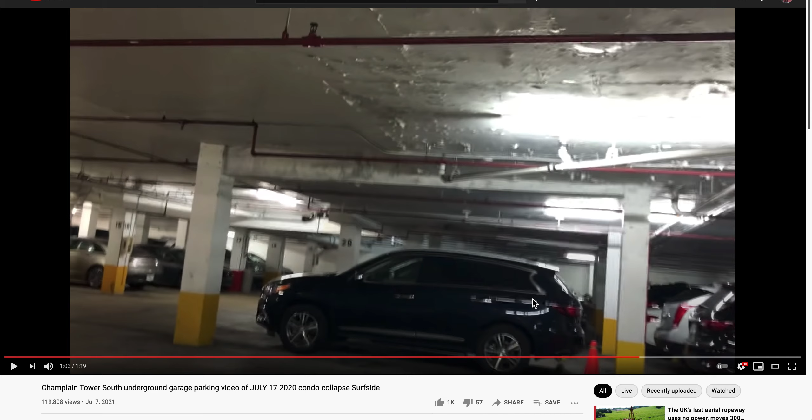That's the gray cat that is screaming like that. She wants to go out, but she got bit by a raccoon, I think, on her ass. So I let her out after nursing her for about 10 days. When I let her out, she wouldn't let me bring her back in for about 3 days. During that time, she licked her wounds raw, down to bread. So she appears to do less licking inside, and no, I don't use a shield on her head. I think that's not necessary.

Hey, chill out. You want to be? I already put you in the video with conversation here. All right, so let's talk.

These appear to be the drains for the flower pots, flower pot drains. I do not think they're drains for somebody's bathroom or sink. So this puts us out in the deck area.

Look, if you note, we talk about the saturation that everyone knows about. You can see it's almost stopped right there. It just goes from straight line, straight up water, to peeling paint, to, well, where's the peeling paint? To none. So right about here, I believe, is your transition from your decking to your main-bodied building.

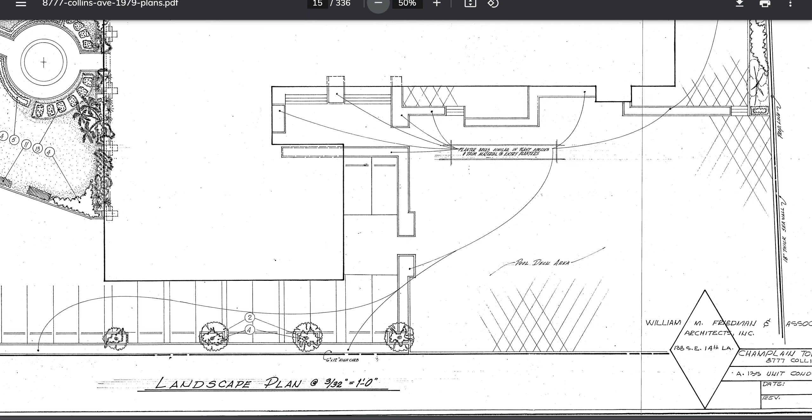So somewhere about here to there, this is probably drains 1 and 2, floor drains. It could be 1, 2, 3. We're looking at, let's go back to the image there. Yep, so 1, 2, I don't know.

There's some more system down there, but this is your BMA, one of your beams. I don't know if it's the BMA or not, or it might be the actual called-out beam with the size and dimensions. Now it's a BMA.

So let's verify. So here are 2 columns here. Remember the dual columns together? They're the only place in the entire building where they run dual columns. A car is between the dual columns, and that would be over here. There's a car, there's a dual column.

Let's see, I'm going to let it play just a little bit. There's a dual column, 1 and 2. There's a car between it. And then we have the dual columns again. So right to here are dual columns.

So catty corner to that, catty corner, right, diagonal, is our location. So dual columns, catty corner to that is our location. So I think we're looking at this, probably maybe this BMA here. And then there's a large one, is that the one that fell on the floor?

So right there, actually, the dual columns is where we see the T-shaped reinforcement on the ground. The T-shape, it is that column, 1, 2, 3, 4, the dual columns. This BM35, BM34, and BM33, integral to each other.

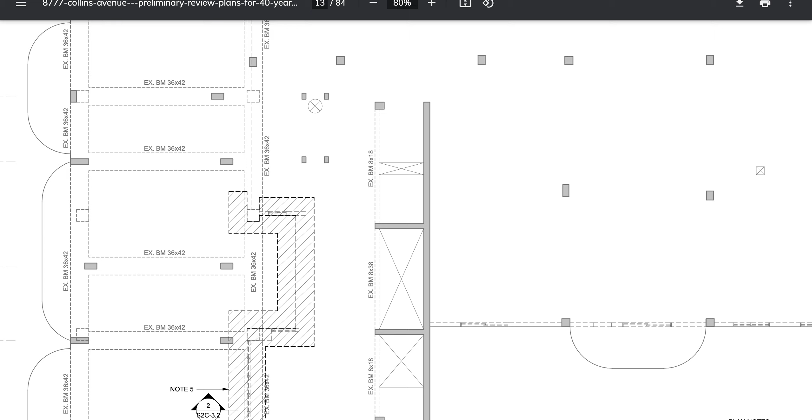So we have, okay, third one over. Let's slide them together. What the hell?

It makes it easy. Someone sent me over to a forum. I went over there. It was long, it was painstaking, it looks like they're copying everyone's video that they can, screenshots, and putting their answer over there. I got tired of trying to read that. The circle jerk, it's just going around in a circle, and I was like, there's nothing, no one. I don't like that. No one's calling out. I don't like the idea of saying this could happen, this could happen, this could happen. Nobody gives a shit about this could happen.

People want to know how it happened. And you guys, a couple of people have asked me, I don't know if they're trolling me or not, asked me, what's the trigger event? What's the trigger event? Well, you have to watch my series of videos.

But we're talking about just the FIU bridge. It's simple: you cannot get failure unless you get deflection. No deflection, you get no failure. The deck cannot fail if it doesn't deflect. It's as simple as that.

And deflection, of course, would include punch shearing. That's part of deflection, isn't it? But it couldn't punch shear without having some form of deflection, because it's connected at the walls, apparently, roughly, somewhat, and over and all the way through. They have a little elevation change, but no deflection, we get no collapse.

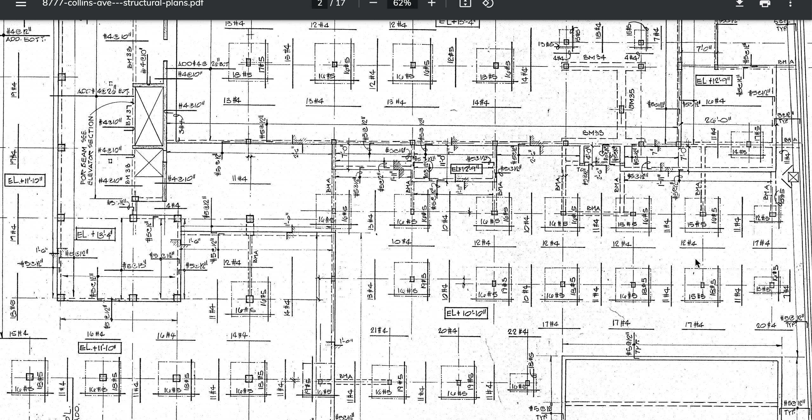The guy that is saying the repairs, he obviously can extrapolate. He says he has no field work, but he can extrapolate. He did two core samples and said this deck is fucking shit. He said this whole deck is shit. He did a sheet on it saying that you should replace the whole thing.

With that said, I've owned a few houses. During owning these houses, insurance companies sometimes will come out before you take ownership, or once they have an interest in it. They cited me a couple times on branches over a roof, telling me that's dangerous for our insurance, we have an insurable interest, we want you to remove those branches. I had to do that on one once. That was just branches, insurable risk.

They have an insurable risk, they have an insurable interest, that's what it's called, an insurable interest. So the dead branches or live branches hanging over the house were too much of a risk for them. They gave me so many days to get rid of those branches, so they didn't have to worry about a lightning strike or heavy winds damaging their structure and making them have to pay out sooner.

With that said, I think the insurance company should not pay out. I think they should wait for the report to come out to see if this deck was actually the initiating cause, via NIST stating it. Of course, if they take the witness statements, you've got to get the start here. But if they're like these, most engineers can't figure out how you get from here to there, then they're going to have two collapses, aren't they? They're going to discount the witness statement saying that on the phone, the lady on the phone - they're going to discount her statement, and they're going to have a failure internal and then a failure external.

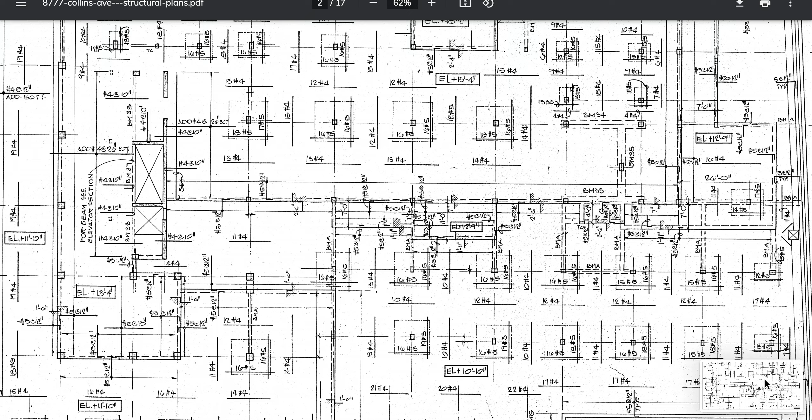And I'm going to show all that again. The way I present is I give you a little bit at a time and let your brain work on it, and then I tie it in. For example, I'm going to tie in the whole entire front wall system. I'm going to show you how to get there from here, I'm going to show you this, for example.

Yeah, really. Come on, dude, come on, brother. Yeah, it's not going to... there we go. Well, text, that's a start. And what the hell, I'll take this for now.

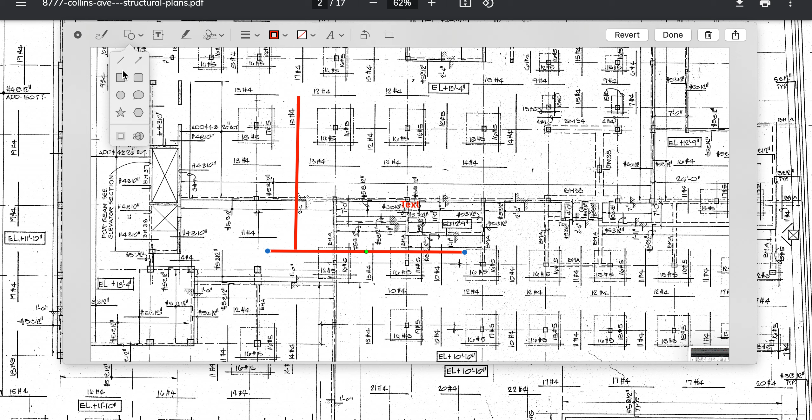I'm going to show you the front wall reaction. Let's just do that down to there. I'm going to get to this for you. I've already showed you a piece of this in the other video. I'm going to get there for you, right? I'm going to show you how we get there. This is a sample of how we're going to get there, one more sample.

Then we see about 4 foot of a pile cap. And there's the pile cap. So we would see about 4 foot of pile cap under each one of these, like that.

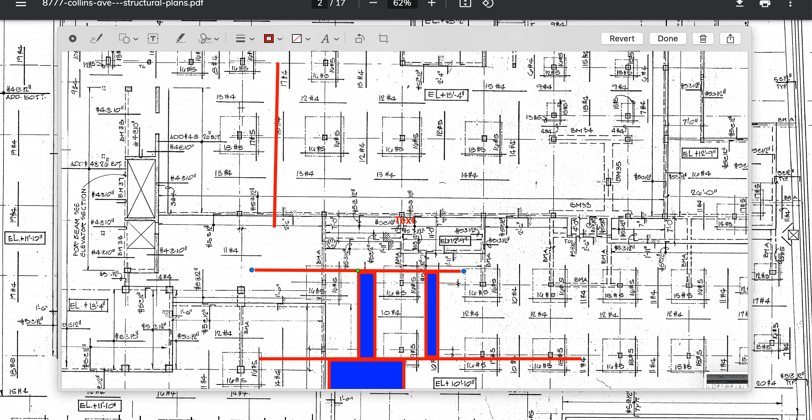Hold on. It's actually good that you watch me draw it, because this is how I can help you see the reactions much better. You can see the reactions much better this way.

Alright, let's smooth these up. That's the floor. So of course I gotta draw one of my cars. I'll do one of my cars.

Let's do 3 of these. We did this already. And so 1, and it could be 4, it could be 6, as many as they want, right? But we'll just do 3 right here, because they kind of look balanced to me.

All right, so here's your deck. Probably real light on this one, right? This is that parking garage area. Wait a minute, there's a structure above it. So this is your building above the parking garage there.

Okay, and then over here to your left, if we can look at it from a profile, these are your floors. This is floor 1, and we'll go all the way up to floor 6, but we won't get too crazy about my heights here.

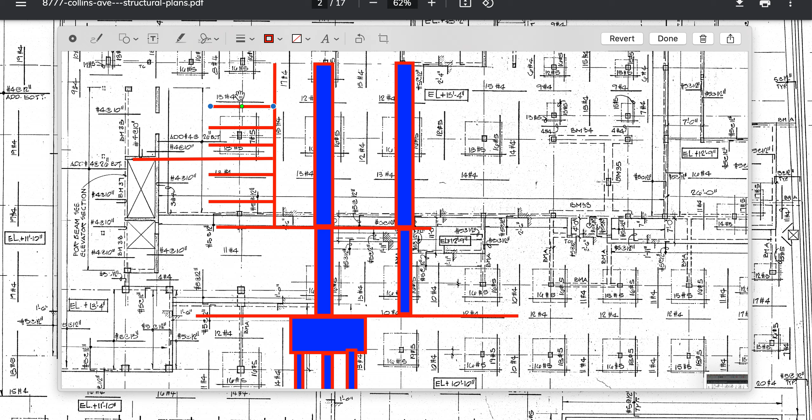Let's see if I can bring out my squiggly. Really, you won't let me draw on this one? Wait a minute, haha, there we go. Okay, so camera. Whoa, baby, whoa. Thought I had my screen. Okay right, so this would be camera. So I can move this over here. Here's Ring camera, pointing towards the ceiling and back to the back of the room.

7th floor, 6th floor, we got a lady with a crack in the wall. We have the deck, we have the piers. We get a little car action going on here, some cars on the ground floor. Let's put a car, this is the driveway through there. So let's do a little roof on this car. So we just do this.

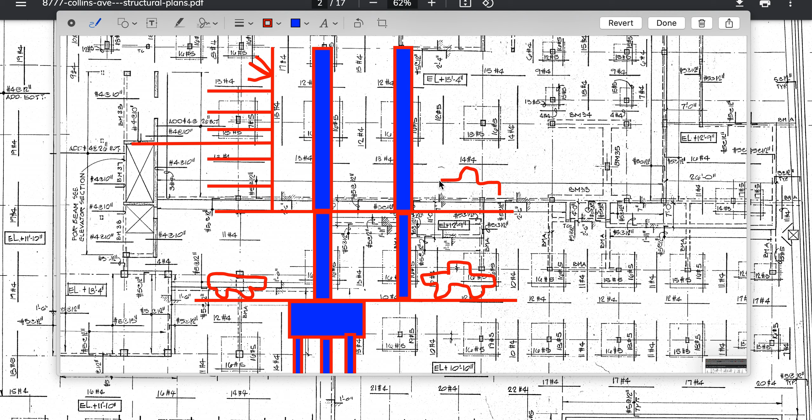Okay, this one gets a little longer. It goes over here. Let's make a truck car. This time 6 cars here, including the truck. So it's pretty close right here to where he comes out his pool area.

So I gotta make a smaller car here. Shut up, cat, you want to go out?

No, cats aren't allowed outside. Didn't you get the memo? No, cats are not allowed outside, go read the memo, check your notes this morning. All right, so this is the car, terrible car, that's a car. Well, whoa, I guess you're allowed outside. So anyway, didn't I get the memo? So you know you're in a video, you know they're going to be talking. That's the gray cat, that's not Bruce or George. That's the gray cat, she's one of my strays, she demands to go out. And that screeching like that, somebody stole her once because they thought she was a stray cat, I guess, and they wanted her, she's so pretty. And I said to my girl, don't worry, she'll be back, somebody local probably stole her. And they said, how do you know that? I said, don't you know what she does when she wants to go out? She does that, she screams until you let her out. Come here, girl, come on. I'm petting her now, give me a second. You're a good girl, come on. You love being inside until your ass is fixed. Literally, I'll let you out. Another few days, it's tough on me too because I know you love your freedom.

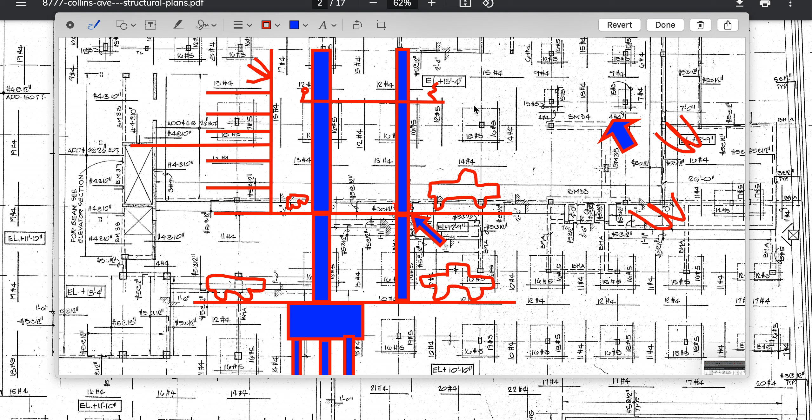And so, yeah, I hear you, beast.

So let's lower this down. I think this starts kind of... I don't know if it... do they line up? Huh? Is it that low? No, because this one has a bigger carport, if you will, over there.

So let's do that. But we don't see this collapsing over on this side, right? So it's not collapsing over here. So this side is stable. But this side of the structure is not.

So when we're looking at it from, it should be south, west side. We're looking at cut away from the west side if we could. This is where the fireman would be down here and the floor down below, looking across.

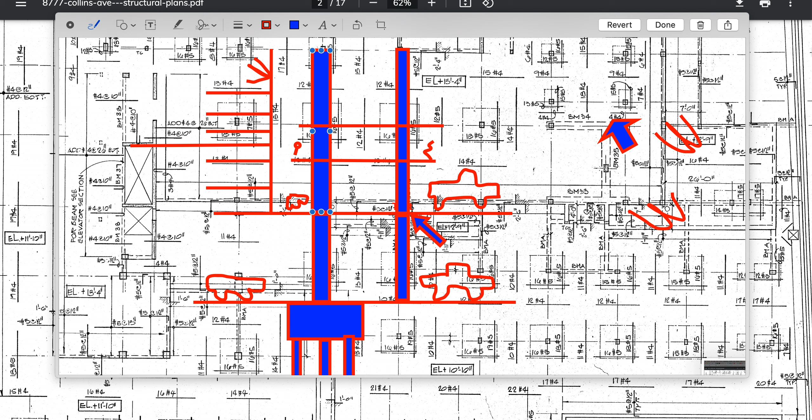So the fireman would be down here and we're looking across this direction. And that's that floor, this one here, and here are the cars up here. It's much taller, much taller.

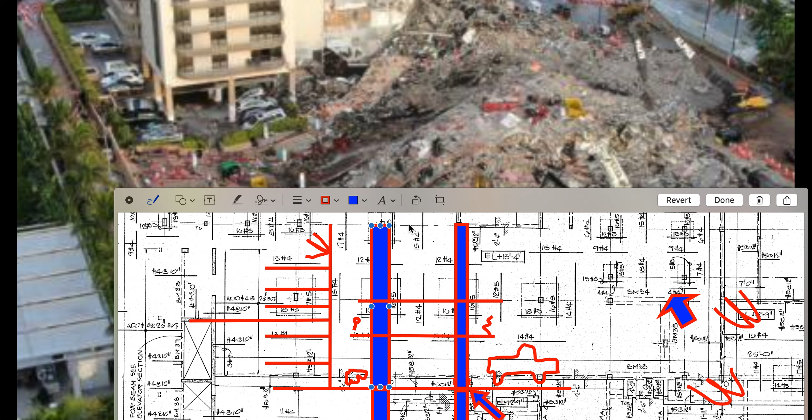She's looking out the window, screaming that she wants out. I know, girl, but you're not ready yet. You're close, I mean you are close. I could almost trust you, but I let you out like this last time and you started licking your ass, remember?

So I just talk to them like humans.

Alright, so we get a puncture, but where it starts failing, I believe, is in the middle there, right? We have images showing that the deck is ripped out like this. So we get these dropping down on top of these vehicles here.

We have these cars just perfectly placed, right? Like they would just drop like that. But when...

And it goes over to now. I might be taking some liberty here, but this section, let's see, let's liberty this back. This section probably stops somewhere about here. Then it goes over to the pool.

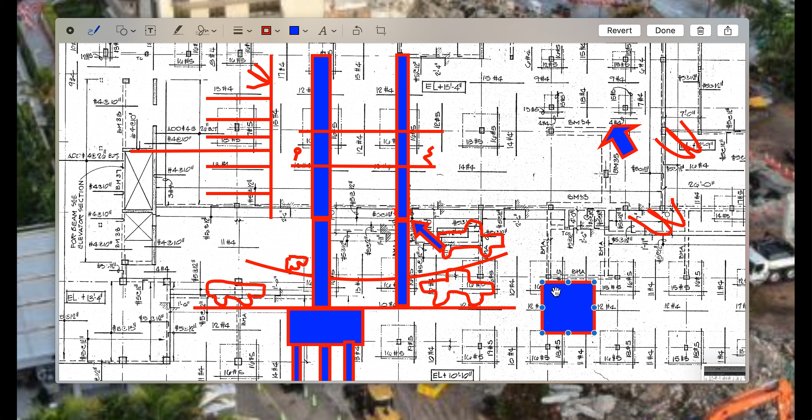So we have our top view now. Good, top view. So here are the cars here, right? The cars are inside here. 6 cars, 1, 2, 3, 1, 2, 3. One falling over this direction. Here's our building over, I'll get rid of that, I guess.

So here's our building over here. Well, actually, here's our building right here. The cars are parked, let me look at the map right here. Cars are parked down here in this section here.

Okay, so then let's just do this. Hold on, bear with me. Huh, oh I can't do two screenshots. It won't let me do 2 overlays of that.

So then there are our vehicles here. I want you to see it overlay here. This is apartment 1 behind. Look, disregard all the stuff and look where my mouse is, looking back onto the map section of this.

Our decking, our driveway is right here. Here's our driveway. Here's apartment. This is apartment 1 in the background, right? That's 111, right? So 111.

First floor, that's our witness room. Our witness position, multiple witness position. Well, the girl didn't really speak up, did she? So multiple witness position out here.

Witness first 111, 111. Other witnesses are the third party witness via the phone calls, records, and the husband, being a lawyer I believe, stating to his sister-in-law, who then stated to the public like she was right there, using her phone thing that really disturbed me with her ability to do that.

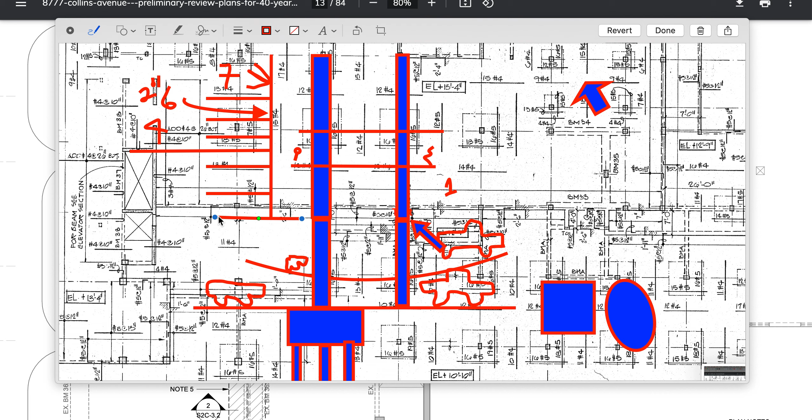During that pulling, they're integral with the wall at this location. So we're integral with here.

Where the beam BMA is, she's looking here, so right about here, or I'd even like to be back to - I think it's the third one back. Follow this over, here's your beam. I'm covering it.

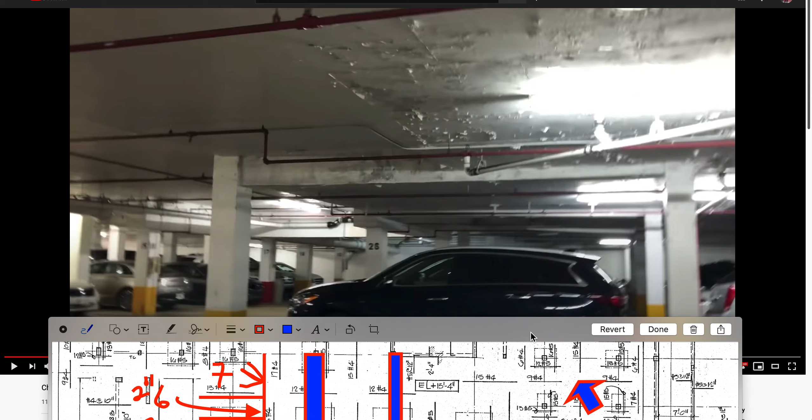Here's a BMA back to the building, right there. Sorry for the guys with cell phones - turns out 50% of you are watching on a cell phone. I looked at that data.

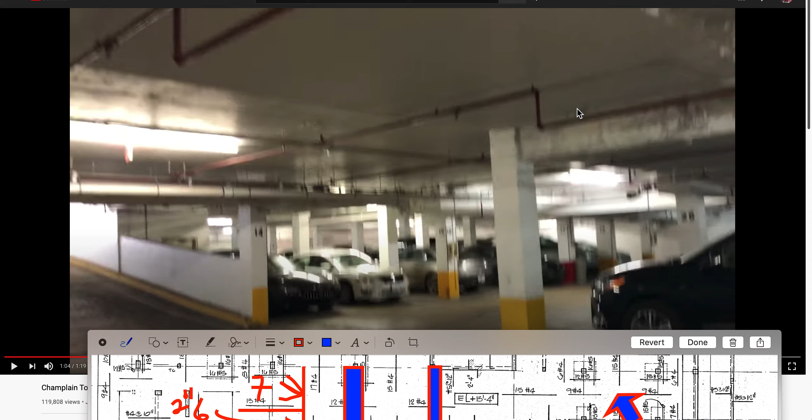There's the driveway - if she turns to the left, you'll see the driveway. So she's in line right where this ceiling falls down. Everyone has a ceiling falling down way up here, breaking a pipe and water coming there. I don't see why the ceiling would continue over to the ramp there.

But anyway, compression is what's going on. It pulls things that are further back towards the camera. We know it does it automatically - you don't have a choice.

She was zoomed in, because when she was zoomed out - oh yeah, she has a beautiful sound. Now you see why she goes out. This is why I knew I'd be able to get her back. I didn't give up on her.

8 days later, someone posted her on Facebook. There's a pretty stray cat around. Someone got hold of me telling me your cat's on Facebook. I don't have Facebook, so I quickly ran out to where the cat was, about 4 blocks away, in someone's yard. They're terrified.

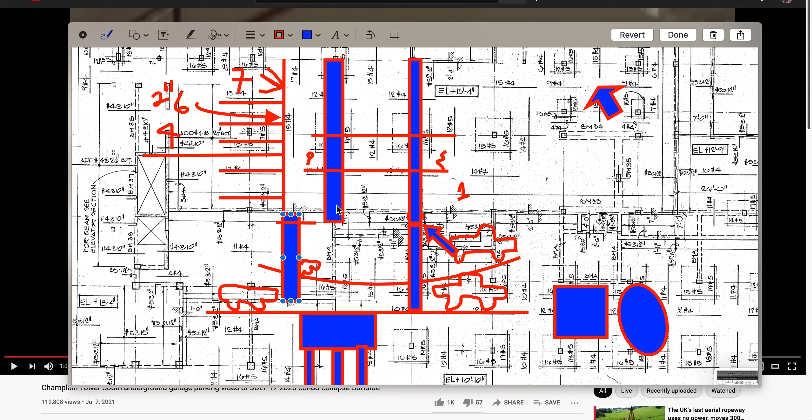So here are your 2 spots here, and that's your 2 spots there. So there's your BMA. Interesting though, very interesting - it's like the water stopped right in the middle of it, right in the middle. Here is the conflict in my statement. July 17 - there's the water right down the break, but it's in the center, pretty thereabouts, center line of a BMA, center line.

The building's not to here, the building starts there. Some of the building in the penthouse area and over to the right, it goes all the way up. It's supported by the BMAs. But at this location, this is just a little planter.

This could be there, about 7 feet of that planter box. And then we're looking - if you look here, it kind of jogs over. This could be that mapping of the planter box here, meaning the planter blocks on out. Not just the planter blocks, actually the porch - here's the porch, let's get that right.

So the porch is dry, the porch isn't saturating down below. The porch has got that elevation, it's doing great. And so from here back are your planter box areas.

So your whole roof is saturated. We know that at the deck because we saw the core samples. It's just shit everywhere. The guy calls it out, I think correctly. Excuse me, the engineer says replace it all.

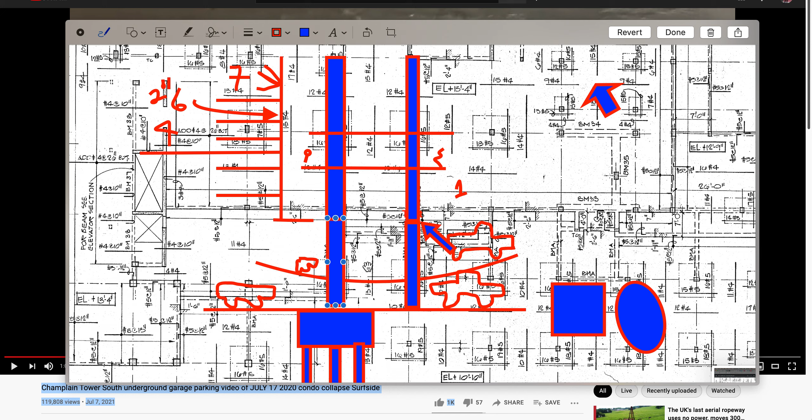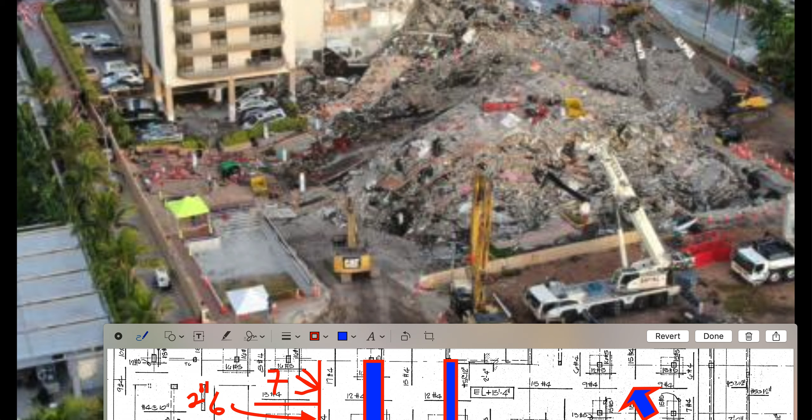So let's push this back in place and change your position back to where the firemen were, where you see the roofs falling down. So that would be back to your visual where the cars are right here. So you're standing underneath there, you're looking out this direction. Underneath, hold on a second. You're standing underneath there, looking out this direction. There's your columns, and we're going to go over rebar, like I said.

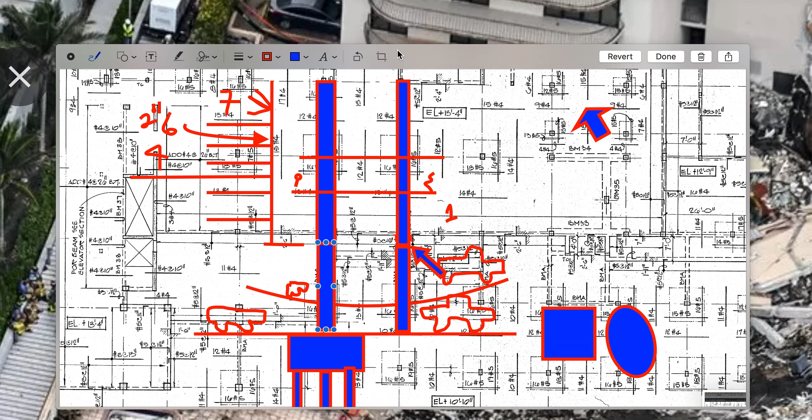I'm going to show you how rebar works. I really want to put in the other note too. We do not have a bulging wall that could have pushed on this whole entire decking and pushed it over to push on the structure. This wall appears to be plumb all the way down. We don't have any forces that are presenting. Closing off the street actually helped out in this case, because now I don't have to worry about some vibration and the surcharging of the loads over here, pushing on that floor, which pushes over to the building, which pushes on the columns.

Yeah, she is actually ready to win. She's almost ready to win. I think if you keep this up for another 5 minutes, you will have won. But then I'll be so mad because I'll see you outside licking. So sorry guys, I gotta talk to her. No.

So anyway, back to this. So this falls down, so looking at that view, it falls down. It slips around here, around these connections here.

This is punch shear, you can get upset about it. Punching shear, all right, for you freaks that want to get upset about it. Punch shear, everybody knows what I'm talking about, right? It's my version of it. I mean, we don't say 2x4 floor joist, 2x12 floor joist, right there, you say floor joist. Nobody gets upset if you don't call out the exact dimensions of it, or 2x12, 16-inch on center, thereabouts. So nobody gets upset, we just call them floor joists. So what's wrong with me abbreviating punching shear by saying punch shear? You guys know what it means. For the people that don't know, they just want to get triggered.

What is punch shear? I see your comments, and I want to say it's the same thing your mother said when we were making you.

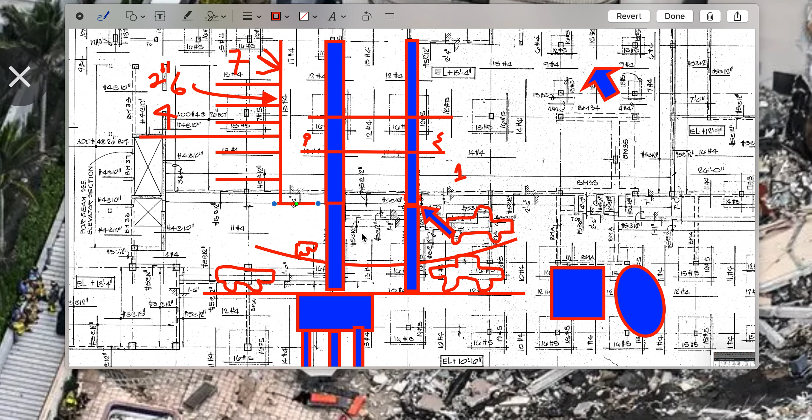So she calls her safety thing, her safety net. The others take off, they know to run. Let's get this deck moving, let's get this thing moving now. So this pulls on this BMA, right? But here's the kicker.

It didn't just pull on the BMA, right? Because you can see it's integral, it's got to really shove this thing over. It's got to pull it when this wave takes place of this punching shear flooring system. Because it's integral, they got links up here when they pour the pad.

I know someone commented that they poured it. It's monolithic, but this part's the monolithic part, and this part will have these shear links on them, going across, and then you tie the floor into it. They'll be further up. It looks something like...

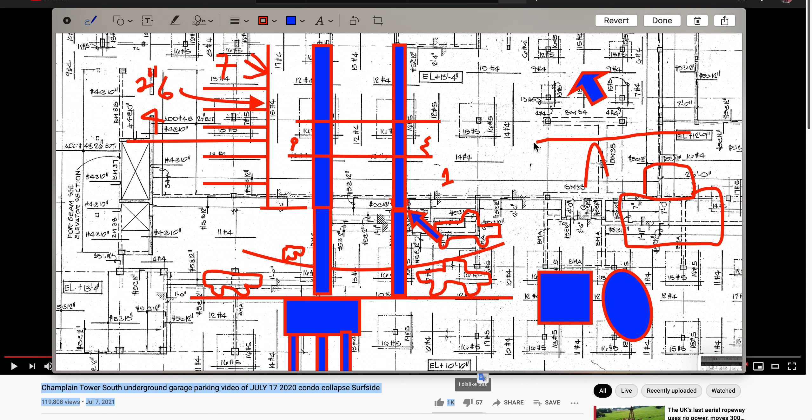Something probably more like this. Let me see if I can tie this around a little bit. So this would be the concrete section, these links will be here, and when they go to pour the floor, it goes like that, and it ties those links and this link together, literally tying the floor together.

This floor system here, okay, so that means I have to do this. So the floor system here, let me do this hand, and we'll do a cutaway. So this floor system here, when it moves, it pulls on the top of the BMA. Because there's no, when it pulls on that, it causes a rotation, causing failure in those beams.

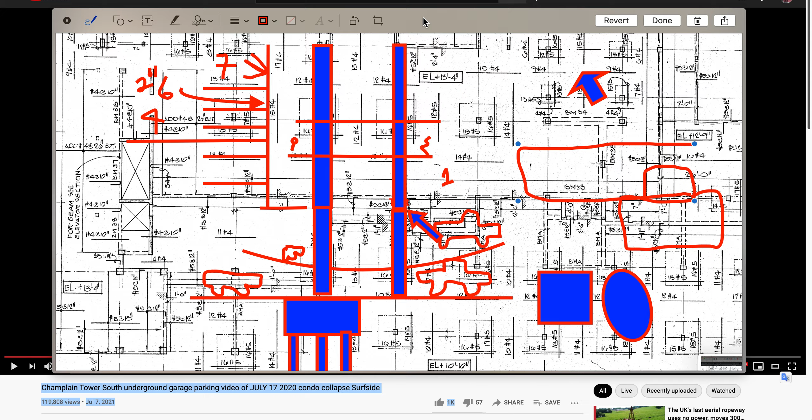Okay, it looks like I pressed play by mistake in the background. Causing failure in those beams here, and separation of the flooring, maybe with no construction joint, it falls down. We don't know, because they destroyed the hell out of this during their excavation and moving of debris.

They did not do a fine job at all, did they? They just went at it. So that causes that floor to separate thereabouts, or maybe over by the ramp. It's hard to tell with that compression going on. And you can lighten it up all you want. You don't know, I've seen a few people attempt to lighten it up.

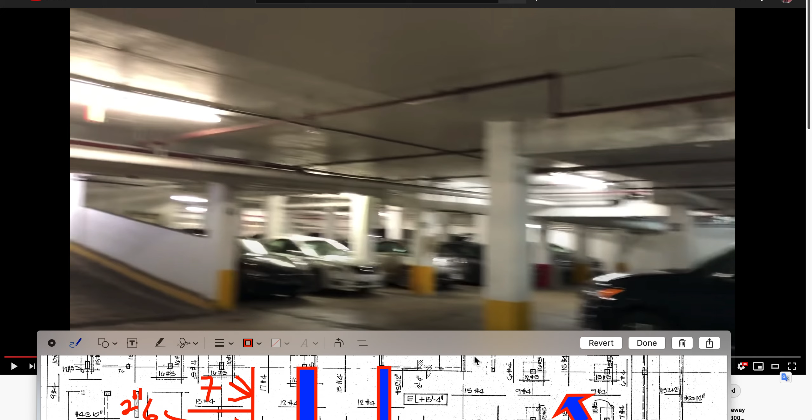Come on, really? The camera sensors, digital camera sensors, are not film sensors. You can't do that. They do a lot of interpretation from one pixel to the next. And in shooting down there, it did a lot of interpretation of the pixels, especially zoomed in. When you start losing resolution, you get more pixelation issues. So, no, though you can lighten it up all you want.

You can say it's this column, you can say I know it's this. If anything, the people, after they escaped and this fell down, that would be their wrong assumption. You're probably looking at their fucking furniture on top of that pad, and not some damn other column, because some time went by, 7 minutes.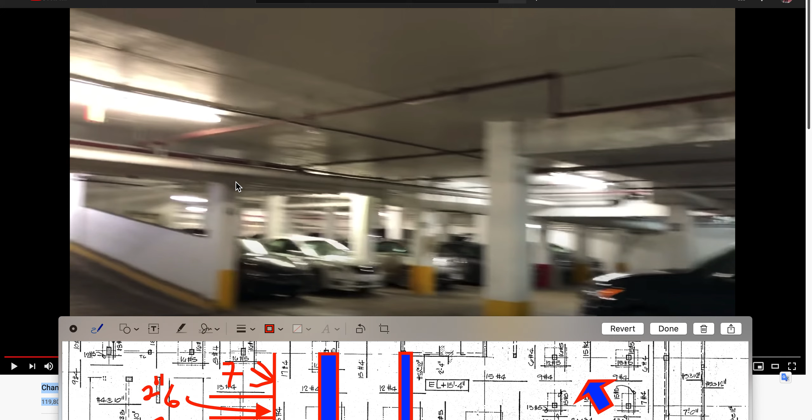If I have this collapsing, if I have this failing right at the same time as the deck fails, I don't think we're going to get 7 minutes. I think the spans are going to be too great at that point from one supporting span to the next. I think we're going to get spontaneous failure, I don't think you're going to get that timeline.

That you're going to get if you pull over a column, and that would be this column. Everybody theorizes, I don't think you can do it with this one. I think you can cripple it. So it's back to this one, it's the face of the structure. You can cripple it, and that gets you your 7 minutes. So let's cripple it now, based on our observations.

7, we have the camera. The camera will then engulf number 8, floor 8. All right, so because we see things fall down in the view of 7, so we have a reaction going on that's causing the ceiling to separate in 8, on the 8th floor.

Wrong spot. On the 8th floor, so this floor right here, this is the floor that the deck fails in a wave pattern. And let's have it doing this.

I stretched it just now, to get down here I stretched it. We know I stretched it. Let's see if I can. So I stretched that, it didn't stretch. I can't start from here, and the radius would be more like this, right? For me to do that, I just stretched it.

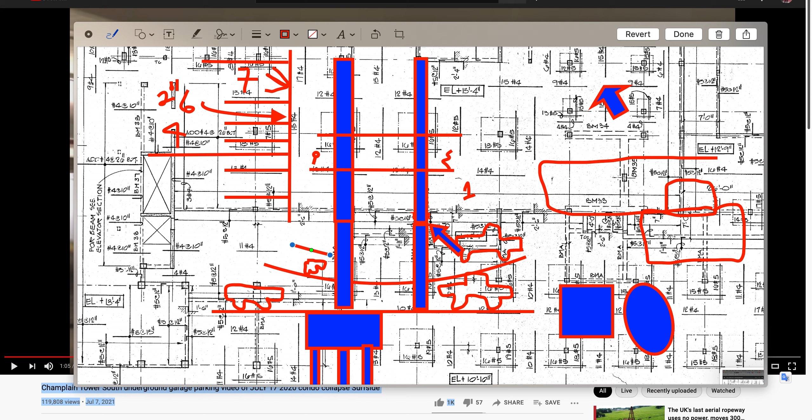Then you can see the timing of it. Maybe this one breaks free, tears off, and around the back side it's connected, and then it falls free. We know that because we can see no number removal on the face of some of these guys. On the face of some of, let's move this over, these guys we see the face.

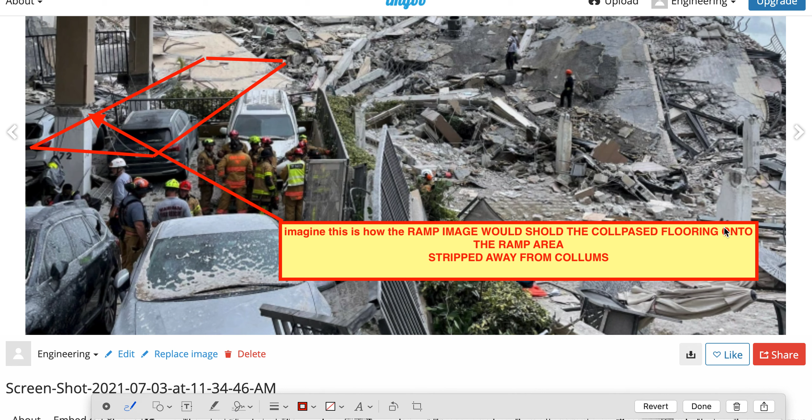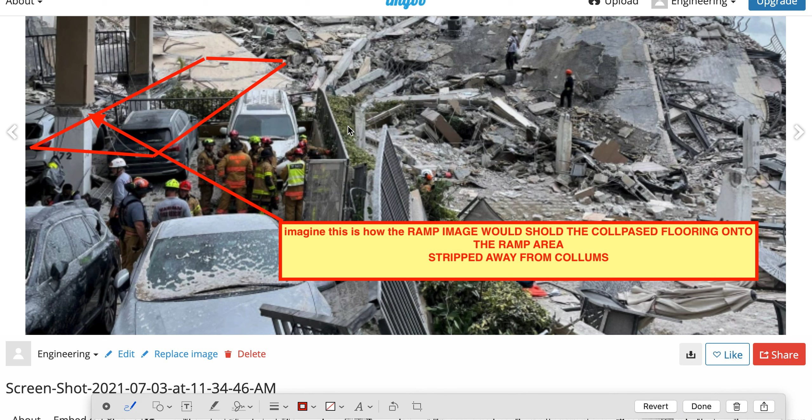This is where we see the numbers. You can see the number clearly here, a number clear here, but some abrasion took place there, the scratching off the number. Here we see the abrasion, so there was a back and forth action. As I explained, the railing was up here, and now the railing's on the face on the other side of this column—they didn't have a railing on the other side. So as this deck collapsed, it shifted over, and I'll show you the buckling of the materials here and here, matches a puncture.

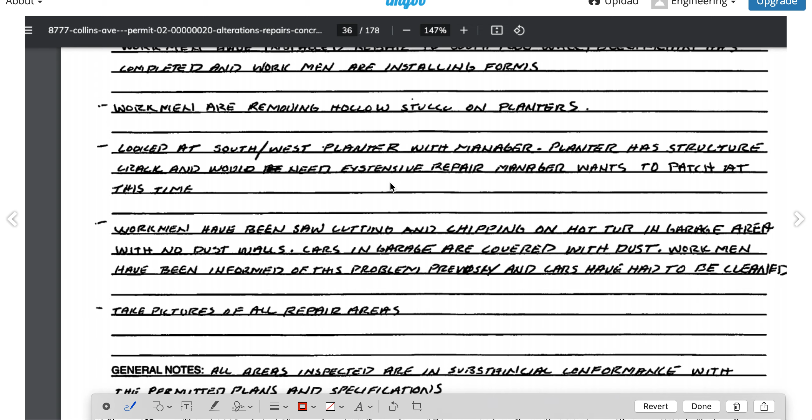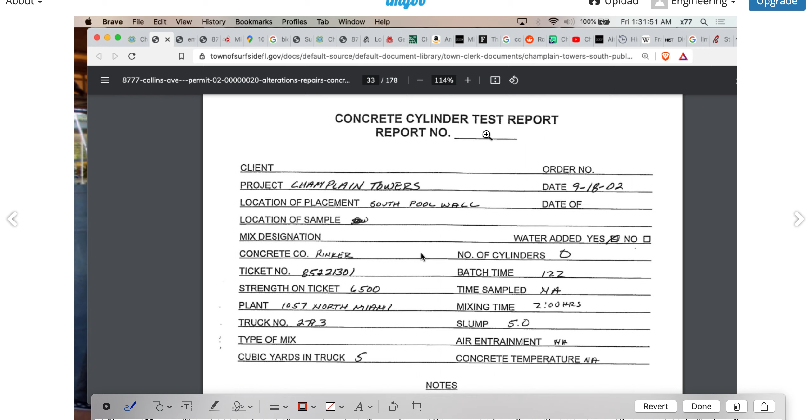These are the reports from the repairs that took place in 2002, and those reports show they did a lot of extensive repairs on the exterior of the building. So I know a lot of people are getting excited saying look at this spalling, look at this crack—well, those were repairs that ultimately look like they might be failing.

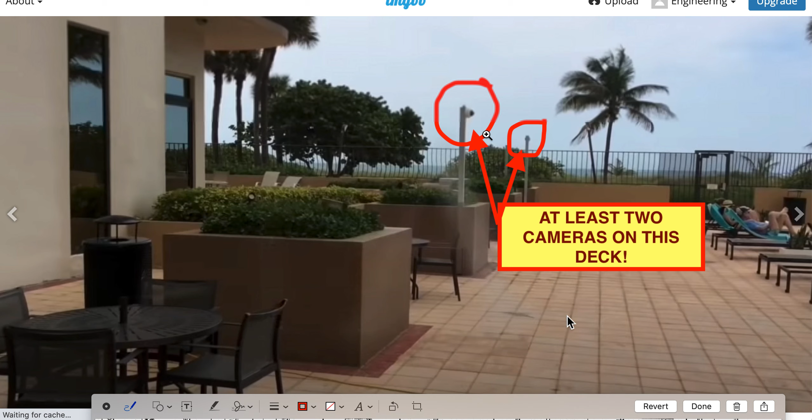Cameras, right, so these guys appear to be over the beams. We see no cracks, deflections in this here, so I don't know what you guys are talking about saying have you seen a deflected beam—I don't see that. I mean, I see things like it looks like a camera up here also, but cameras there and there—could be lighting. So we get these numbers that are in place and some numbers that aren't in place.

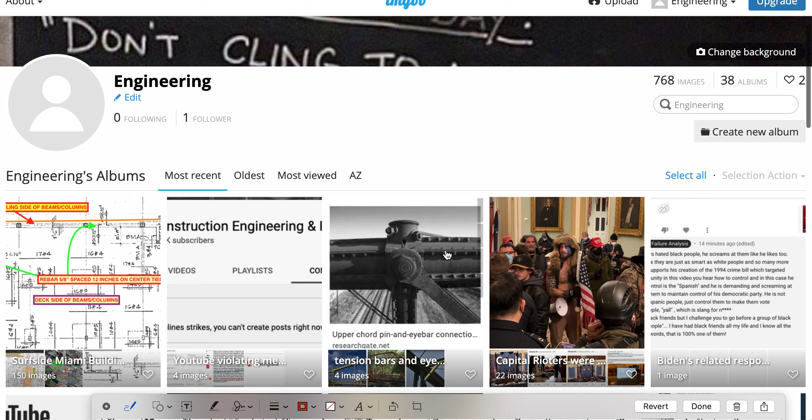But this is a very important board up here: don't cling to a mistake just because you spent a lot of time making it. It's very important, it's a way to live by—don't cling to a mistake, sometimes you gotta let go of it.

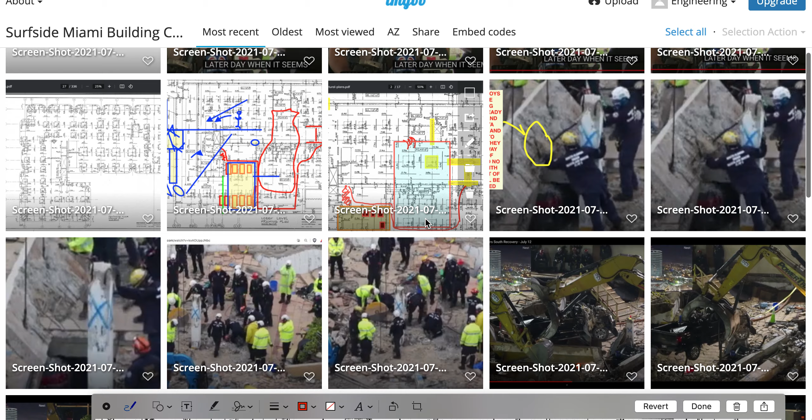All right, Winky Man, where are you now? We saw them taking the debris away, making it debris. The wall's in place, it looks good. Now the wall has got some damage on it back there in the video, so don't get all excited saying that was at that point. There's a crack there, yeah, the crack there—it shows that poor wall system fractured at that point.

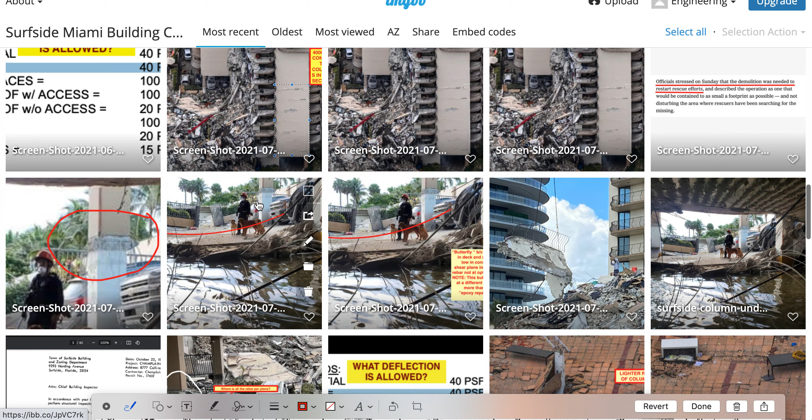Thought I had more images here—oh, there you are. Rotation, I'm trying to find that beam. There's no construction joint there that stops the collapse from going towards the pool. Right here, here we go—this is from that side. Here are our numbers.

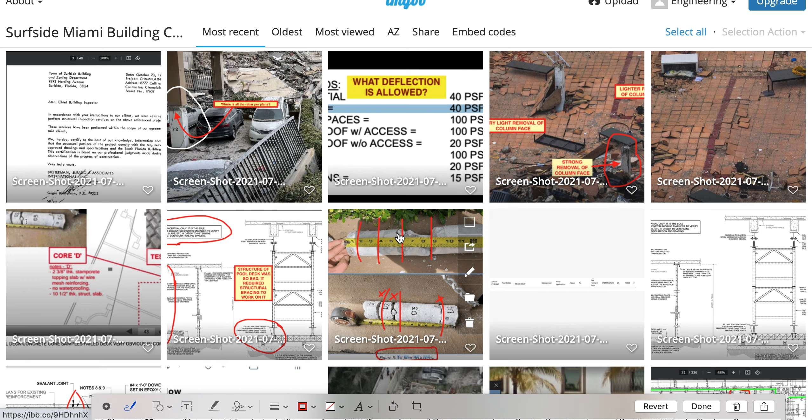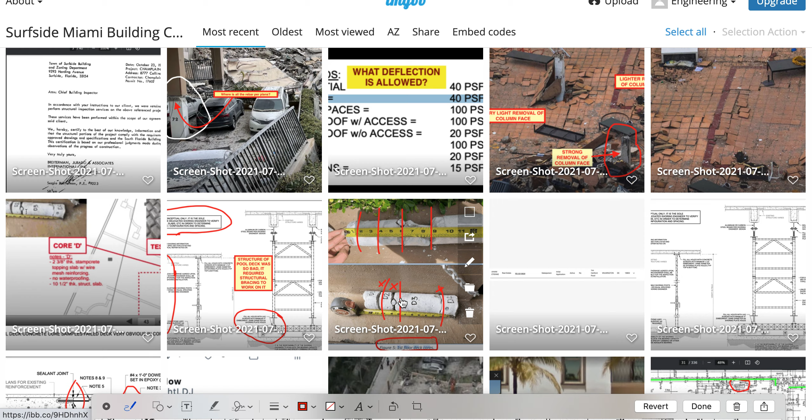Let's take a look so you can see the two samples they took—neither sample, both samples are shit. None of them are just solid cores with a piece on top, with the overlay on top. This one looks like the overlay, this is the overlay side, and it looks like it's doing pretty damn good on bonding. But over here, this core sample by the structure appears to be shit—they're not integral anymore, the rebar and this all separated.

It's just laying on top of that steel at this point, being held up in a mesh pattern, perhaps from one section to another, almost like walking on a springy floor. But the loading—human loading plus the dead load—has probably just caused a lot of creep, a lot of bow in it. But he didn't make a mention of that in his report, checking it for level.

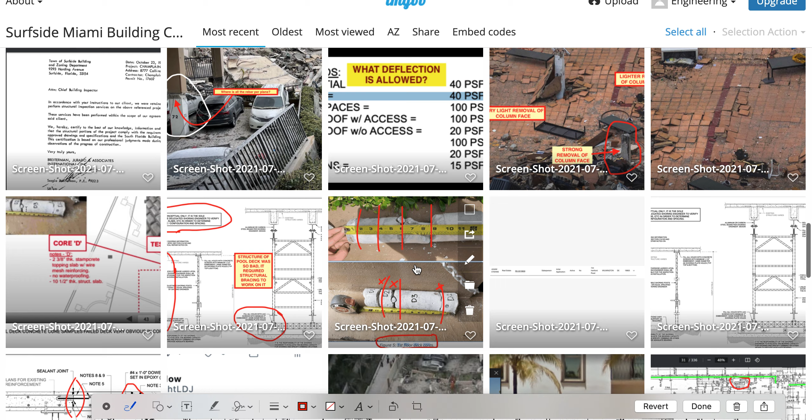He did make mention stating that the underside is level. But he only took one core sample, so I don't know how he determined that. If he only took one core sample over there and a core sample on the far end, how did he determine that this was a level floor? If you measure from underneath, it looks like a flat ceiling. You'd need to take multiple core samples, here and here, and if they both come out to be the same dimensions, then you could say it was a level floor. But for him to take one core sample and say this is a level floor, that's pretty amazing.

So somewhere in his reports that we don't see, he did some more exploration that we know not of.

87 is there. We can clearly see that it rubbed off this side. So this part of the deck, when it came down, rubbed off the numbers. Yes, there's material there. It shows it here also.

This is more of a drop, and since it had no room to go, it fractured in the center. So you're looking at this piece here that came off the center, fractured. Pulling this pull out was only for the deck support, only these little rabbit ears turned out, and they only turned out maybe 14 inches. That has punch shear protection on this decking area, just turned out like 14 inches. I don't see any more reinforcement here.

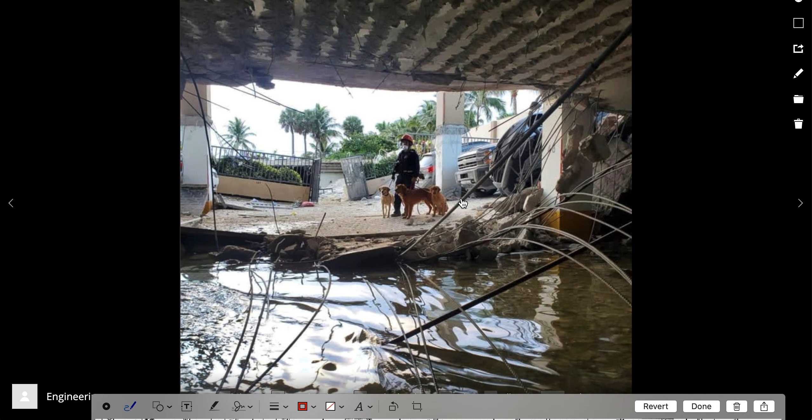So I do believe we get multiple failures, but this rebar here is doing its best to pull this deck, hold the deck, and creating a fulcrum - using the steel like a center point of a circle. So using the steel as the radius, the point of radius. So here is - that's the dot. This is the point of radius.

So here's the deck up here, and it holds on right here. So the deck tries to collapse. The steel stays where it is and says no, and it stays. It's staying right here, and the deck's trying to collapse and go down, but the steel doesn't stretch. It starts ripping from the ceiling, but also holding its position. So that pulls it back slightly into the columns, giving us our shifting.

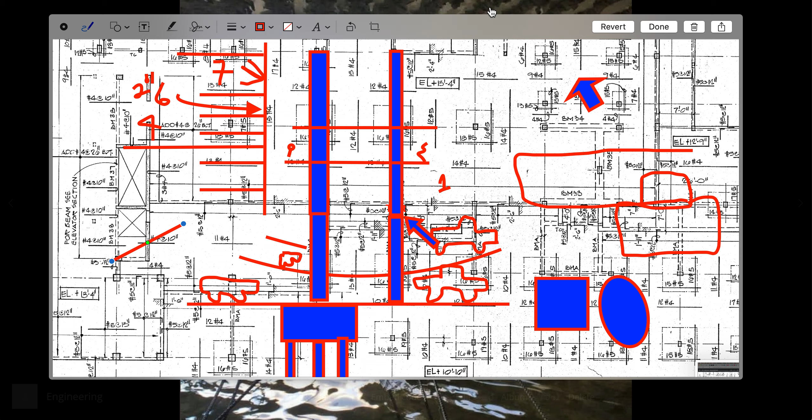Giving us some shifting action going on. There's a bias on the angle here because it would support a confirmation bias. My shifting action - it almost looks like it's that direction there, which will help me get this peeling off like in a 45, not just peeling straight down, but peeling off in a directional angle. It's biased. There's nothing there. I can't prove it because I can't see it. I can't see it in multiple images of it.

But that would get us our pulling back of that deck because of the anchor point here. The deck wants to fall down. It says, nope, I don't want you to go.

Okay, Bruce, now you want to do a cameo? So I want you to think of that.

Now, let's finally jump into this thing. So now I gave you the data showing you where your deck is. Your deck is pulling away.

It pulls away from this column, the first column. We've got columns out here and here, but there's some grinding, which means it pulled away on this side. After that, it pulled away as it did the wave of up and down here, right?

It pulled away, ground some numbers off, but it pulled this way from here. Boom, it falls down. People photograph it from this way, here's my camera again. They photograph down the ramp and notice what appears to be a floor, and possibly the lady's furniture. Everybody's calling these beams and things like that. That would be a beam in here, specifically this beam or this beam. You can pick your poison on that.

To do that means you now broke apart a BMA, which would be the floor breaking apart of the BMA. That's pretty badass, we'll come back to that. That floor breaking apart of this BMA, this integral piece here, and pulling that down. Not in my book, I don't have it that way. That's biased because I said not in my book, but I don't have that happening.

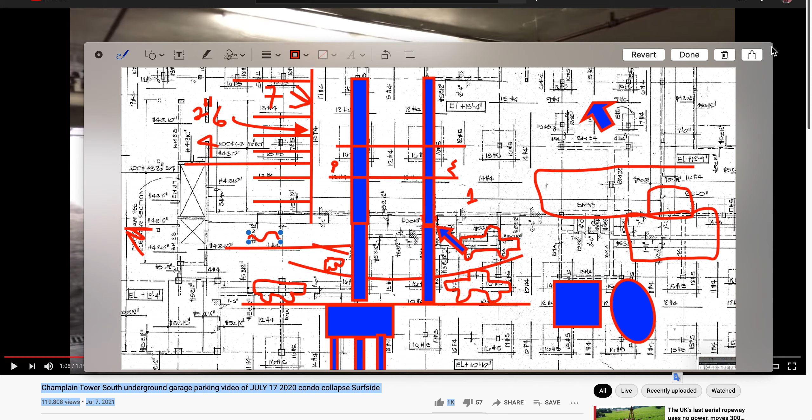All right, so we get that there, but we had a reverberation, vibration in the wall there. As this deck went down, it was ding, like that.

If you look at 7 up here, let's line these up. Here's 8. I don't want to go too far into them because it's unfair to me. Let's bring it over right to where it's almost touching, because if I go over overlap, it won't show the reaction as easily. Like right there, that's probably an overlap. So I'm just trying to get close so you guys can see it, get it yourself in your coconuts.

So there's that. As I pull away this bottom floor a little bit, watch right here, 7th floor ring camera up here. As this vibrates just a little bit like that, as the floor pulls away just a little bit, you'll get your material separating here and falling down.

On the 6th floor, she gets 2 inches. So we can actually do the math of the wall height, and you can figure out where she's seeing 2 inches. We need to know, did she see it at wall height? Did she see it up here? Did she see it at the floor? Where did she see it? And she has 2 inches.

So when it did that, when it shook like that, going up the wall, the reaction, it didn't just place itself back in. I think when it did that action, it possibly happened right about floor 6, did that for her, and it didn't place itself back.